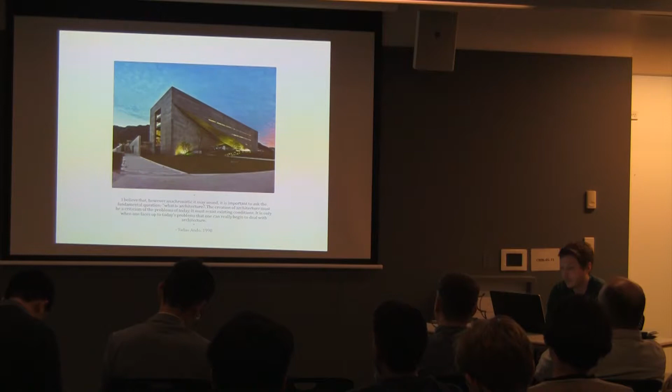So I'd like to propose the idea that producing architecture is an inherently political act. By building form and space in the city, we support established ideologies or the status quo. We stake out space for autonomous action, or we probably do both to certain degrees.

I would propose thinking of architecture in the city as a kind of material framework for society, which emerges from within society but also alters the course of society. These may seem like extremely basic notions, but I'm arriving at them again to question where things are going.

Through the organization of material, physical material, as a device that mediates the interrelationships between itself, people, the city, the climate, and the social and cultural context of a place, I think architecture acts politically in the means by which it mediates those interrelationships.

Partly because the AAVS is based around Maison Domino, a criticism of Maison Domino perhaps, I'll present a few examples of instances where architecture has been used as a political tool. Throughout history, many of the greatest shifts in architectural style or formal organization have been consciously employed as political devices.

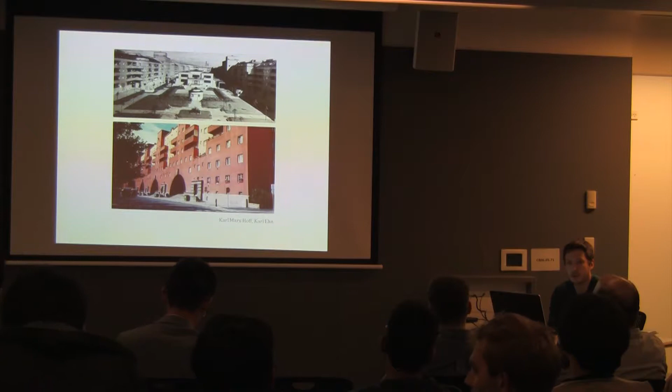The Viennese superblock did not propose a new style. However, its radical formal arrangements, reorganization, and abundance of collective facilities served to reorganize communal living under a new ideology. The intention of Karl Ehn in doing this was also to empower what he saw as an underpowered class within society.

We were just discussing this the other day, and it's a speculation, but I think if you look at the recent pop-up of different architecture in Georgia, it's not coincidental. Georgia was just in a war with Russia recently, and it's recently separated from the USSR. It's been 25 years, let's say, but I'd argue that in many cases these buildings carry traces of a Soviet identity, but they smooth and contort them to create a new language as well.

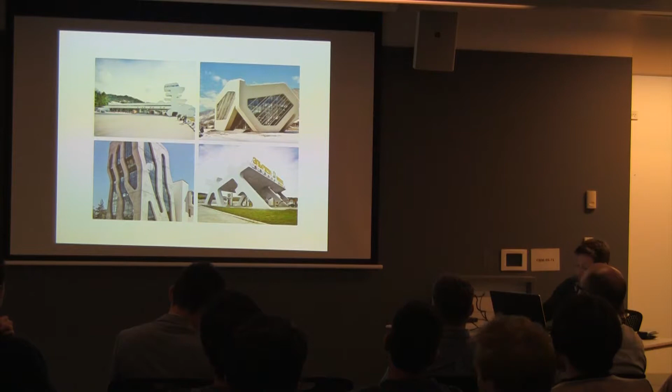I don't want to recite all these quotes, but this one's nice: architecture is political in the way that, as a space-time sensorium, it organizes being together or apart, the way it defines outside or inside. Architecture is political also in the manner by which it makes the controversies of reality visible by means of its own spatial and aesthetic syntax, and can enact new spatial and aesthetic formations of sociability from within. I think that captures quite well what a lot of these examples are doing.

Nevertheless, some people, former mentors of mine I've had agreements and disagreements with, and I've appreciated actually Patrik as a critic - I screen captured this off of Facebook before I left London, and it's a pretty bold statement, so we can give him credit for that. He says architecture is not politics, not art, not science, not engineering. It is the design of communicative spatial form.

You can agree or disagree.

I think the last 15 years has seen the level of sophistication at which we, a young generation of architects, have been able to put to use an arsenal of generative tools, and we've become very technically advanced. However, in many cases we lack the foundation for a reflective, critical discourse attached to the work, and for me this is especially apparent at the urban scale. So this leaves us wondering, at least for myself, why we're doing what we're doing.

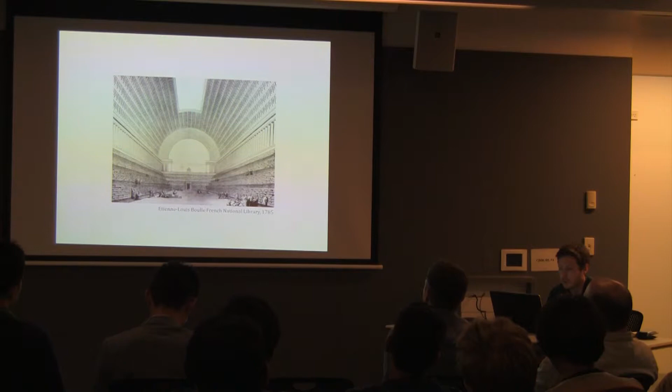What is the question we're asking ourselves now at this current point? I think we have an opportunity to revisit and reevaluate fundamental questions which have both recently emerged, but also persisted throughout the history of the profession. And I like to reference Etienne Louis Boullee, who began his seminal writing asking the same question: what is architecture?

He was the first architectural writer to reply to Vitruvius, and this was 1,600 years later, I think that was about right. But saying architecture is not firmitas, utilitas, and venustas, but that the first issue in architecture is neither technical nor aesthetic, but philosophical and ethical.

I think we have to understand the context in which he's saying this. He's living amongst the political upheaval in France at the time. So I believe that architects should always feel a sense of responsibility, especially the people working at this scale in China, let's say, and other places in the world, to consider carefully spatial organization, materiality, fabrication, construction in their work, much as potentially architects in a time of political crisis do.

Can we call the situation in China a political crisis? I think you can certainly call it a kind of environmental crisis and a crisis of architecture.

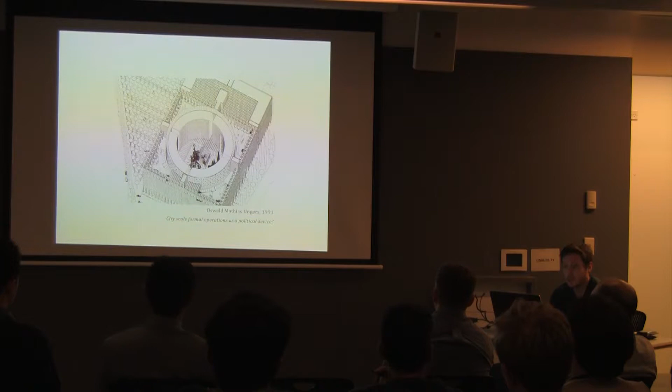The formal and spatial architectural autonomies are essential to what makes a city, and it makes a city a kind of essential arena for agonistic struggle.

I also like to cite the open frameworks of Yona Friedman, Cedric Price, and recently Alejandro Aravena to illustrate the idea that architecture can give autonomy, create conflict, negotiation, evolution of identity, and as he was saying, a mobility unfettered by the historical imposition of politically or economically imposing urban typologies.

And I also think it's just fundamental that architecture also has the means to operate politically against a wave of global homogeneity, and this happens probably spontaneously, especially in the case of Wang Shu, through a kind of climatic, geographical, and culturally specific responsiveness. I think this is something that's probably already integrated into a lot of the work coming out of the new generation.

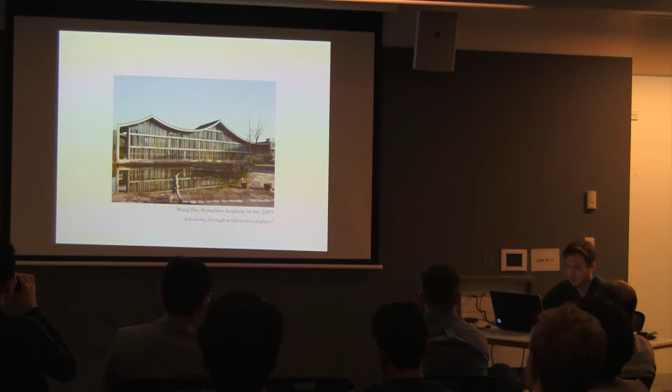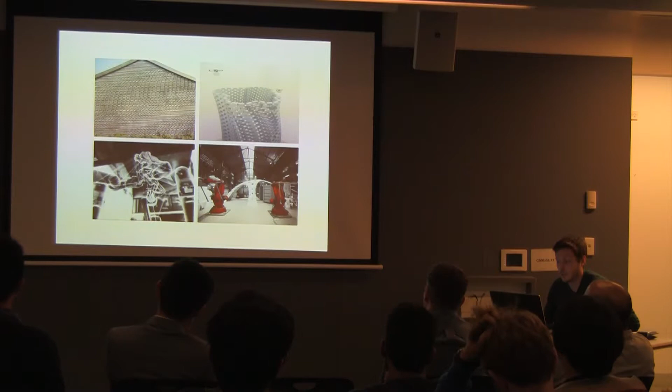So the question now, I think, is how do these new sets of tools and technology that we have at our disposal present a set of new opportunities to address some of the questions for understanding and response to a vision of the future for the material fabric of the society we live in.

I'm going to show a few projects. The first set of projects, some of these are quite old, and loosely related to that spiel, but the first set of projects I'd like to present are a few workshops that I've been doing at Hooke Park as part of the AA visiting school there, which is called Make Lab and is now directed by Jeroen.

And just to cite Mr. Kwinter, in 1993: our culture is moving decisively away from classical mechanism and reductionism—more specifically the physics model—as the system and method of explanation that has dominated our modernity for nearly five centuries is giving way to a biological model. This constitutes one of the most dramatic shifts in thought since the Renaissance.

So to try to frame this, the primary question we're asking with some of these projects is: can implementing new forms of computational fabrication technology set in motion emergent architectures that respond to event and context in a way that's unachievable through direct human intuitive design? And should the architect operate at the level of system enabler? This is, I would say, potentially a legacy of DRL as well, but framed in a slightly different way.

So we did Make Lab 1 in 2011. This is the forest of Hooke Park, part of the AA, but located about four hours' drive away in Dorset in the UK. The challenge we presented to the students was: take the Microsoft Kinect camera, take this custom CNC device—which is a briefcase that can be taken to the forest—and you have five days to do something with it.

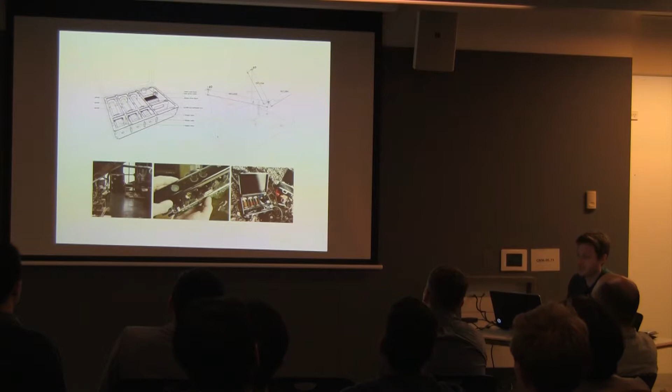They hung this—this is how it works—in three points, to be able to move this pointer anywhere in Cartesian space inside of that triangle. So through a bunch of testing models, they started using local timber as a structural material for building a kind of frame, and they designed a simple twist-in eye hook and cable tie system to connect the lengths of the hand-cut timbers.

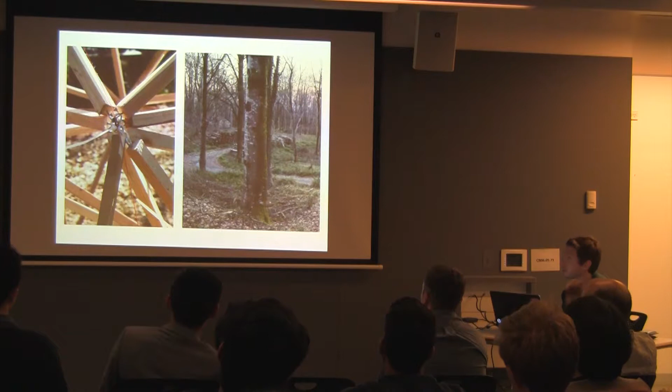What they did is scan this path for the first day while working on some models, and collected movement data from the site to generate a point cloud. Then, with help from technically skilled people, they translated the variable density point cloud into a 3D Voronoi with triangulated faces using an algorithm, so dense areas were kept clear so you could still move through, but with a higher density threshold on the edge of the path. There was a little bit of fiddling, but it was quickly done.

The triangulated structure in the design software is described as a series of coordinates in space, and then the CNC device points out these points, and the participants just follow it around and tie up these nodes. The amazing thing—the epiphany that happened after the workshop—is that no material is pre-cut or measured. You don't need plans to build it. You just follow the CNC around and construct something that otherwise, to build precisely, would have been a total nightmare.

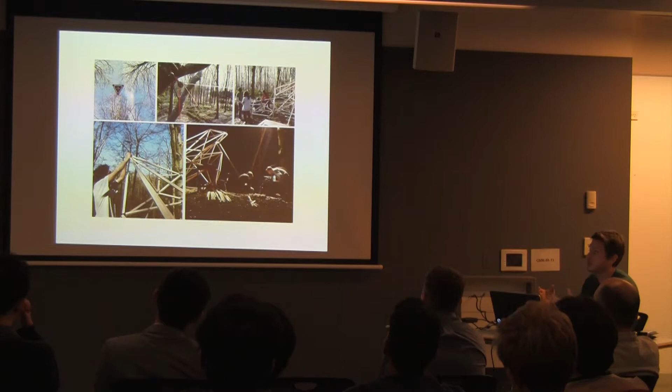So I'll just show a short video if it works.

This is just the initial setup—that's actually me in my kitchen calibrating the Kinect camera. I think that's still testing scans. This is testing to calibrate whether we know this thing is working or not, so we take a time-lapse photo and have it follow this path to see if they match. Here's the CNC pointer during some testing—there's the digital version you saw in real space. There's the model; we had to sort the points to sequence the construction. Sorry, it's a bit choppy. There's Jeroen and I, with a forest table wedged into the mud in the forest.

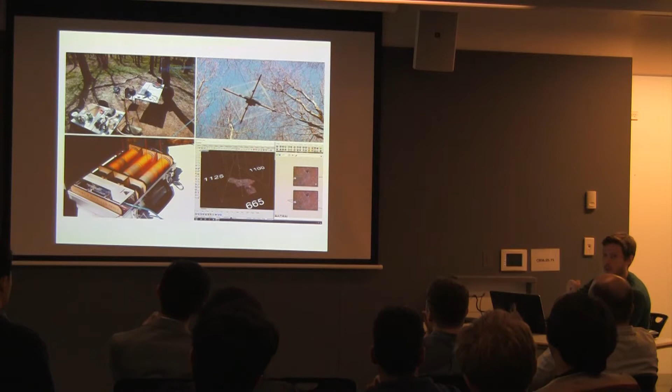Someone cleverly pointed out that if we just recognize where the lightest point is in that space after every weaving move, we can position the next weave to try to cover that point. So this just happens over and over again, continuously stitching, using a really simple clip-and-blue-rope system.

And you can see the CNC pointer there. We had to add a really long member to it to be able to get to some of the points, because there's a ground-to-tree-to-other-member pulling sequence. Ideally we would have gotten a lot further with this, to the point where it became so dense that you could actually read very clearly the space. But this is as far as we got.

It was quite a tedious process. But it was really amazing to look at this thing after it was built in the forest, because the trees are blowing and you see this thing kind of contorting and stretching in the forest. Maybe it's just symbolic, but I felt like something really had emerged out of that process.

So I'll also talk really briefly about a few projects from the unit. As I described earlier, one of the areas of investigation and curiosity is architecture as a framework, with the architect becoming the designer of an infrastructure instead of a final form to be appropriated by users. This allows us to expose some fundamental issues architects deal with, and the architect in this case becomes a sort of material policymaker and conflict mediator.

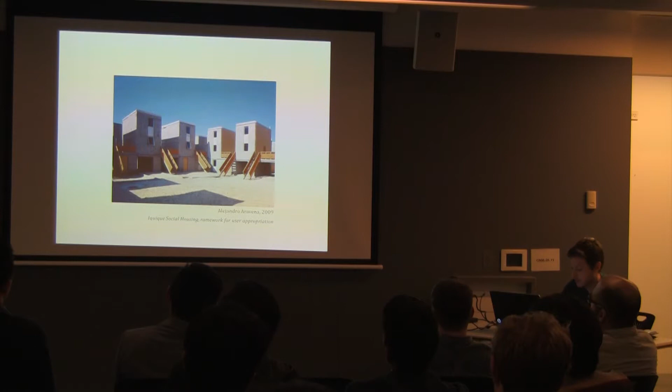The example I cited earlier was Alejandro Aravena. If you know this project, he did a social housing block in Chile with community meetings. The idea was that the site was so small, but people still wanted the ability to build out from their house to expand. So they came up with this solution, which I think is extremely elegant. You can see a few years down the road that people did expand, and they expanded it in the way that they chose to. So I almost see this as a kind of identity generation machine, though in a slightly watered-down version.

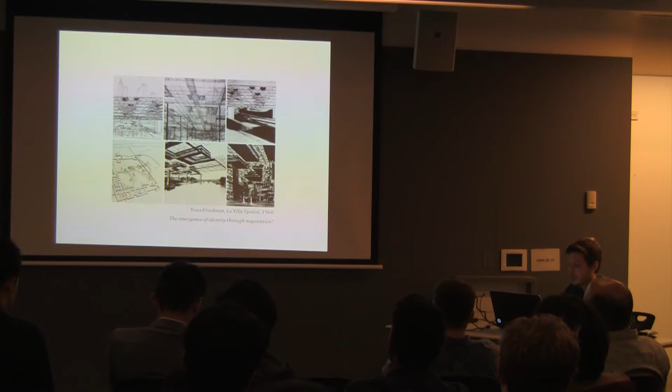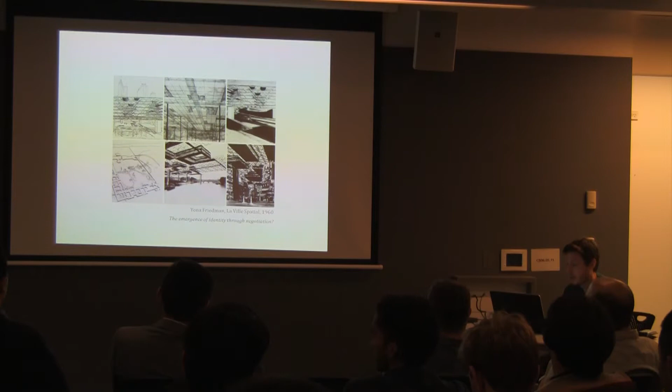At the Team 10 conference in 1960, Yona Friedman presented Ville Spatiale, which is a kind of lattice work floating above the city of Paris as an infrastructure that could be filled in the same way with housing. So planning rules could be created and recreated within this frame according to the needs of the inhabitants and residents.

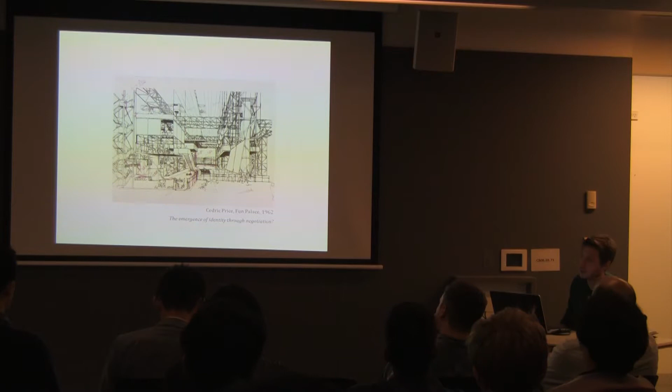And this is said to be the model for Centre Pompidou, that it was actually Rogers and Piano who adopted that idea. I think it obviously got constrained quite a bit, but it's still quite clear. So, a few examples of the work.

We do at AA in the unit system, we have two terms. First term is October, basically through the beginning of December. Then we have the second term, which is quite a bit longer - second and third term, about four and a half months.

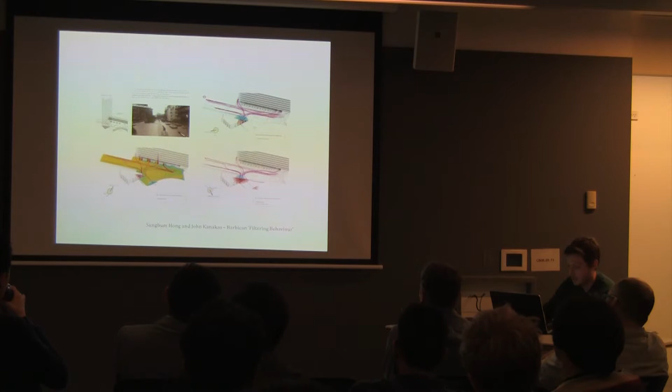Last year, John and Sung Bum spent several weeks at the Barbican doing a similar exercise, this time with more environmental consideration—sunlight, wind—but also spatial characteristics and program circulation, to understand how people use the space. They designed a flexible, parametric system for variable apertures to create different degrees of light penetration, sizes for social gatherings, or privacy levels.

They used these mappings and flow patterns on the site to graft the project into it, with the aim of provoking unexpected encounters with the space and between different people, trying to make people stay longer in the place. It's a terrible rendering, but that's all they had.

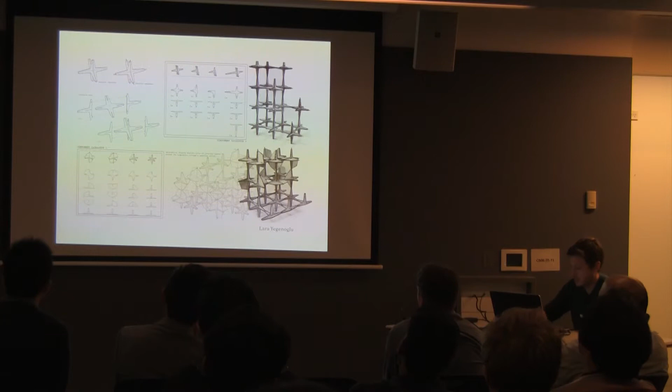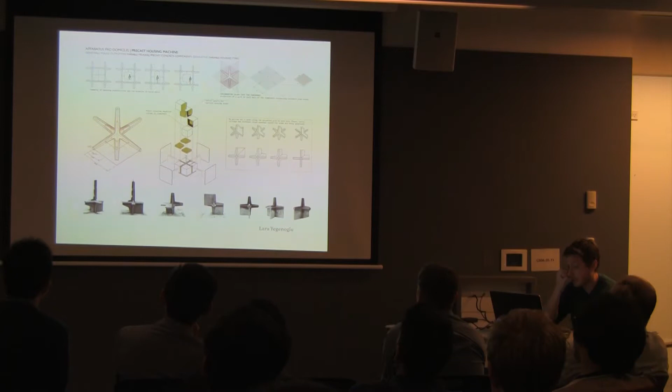In 2012, Lara created a system of tri-axial structural components, cast inside a customizable variable mold, so they could create a whole range of components—different lengths of members, different faces—and they built a one-to-one prototype.

This thing actually bottomed out the rental van getting the cement. They lifted the pallet into the back of the van—pretty heavy, but quite cool. We had to use a loader to put these on top of each other.

She also studied the typical kind of house in this. We went to Chongqing, China, and she studied the typical house and living condition, starting to make variations and modifications on that.

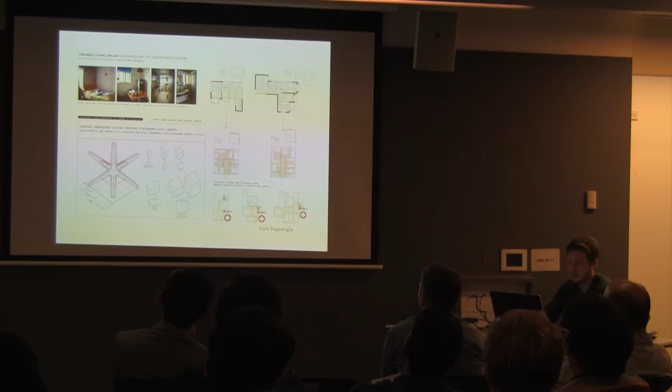Then thinking about how she modified the mold and the component to suit creating these types of housing, she started to go to bigger clusters, looking at social space and different layers of in-between and shared space, also drawing on Chinese models in the region but trying to twist things a bit to provoke slightly different scenarios.

She was doing hundreds of these studies of how you shift blocks around a bit, looking at the way that people can view through and occupy this space.

She starts working—this is actually just for the AAVS guys—this was in Grasshopper. She starts building a model to be able to stack, because she wanted to fit 500 units into a 150 by 150 meter site and make sure that the living spaces all received two hours of morning and evening sun. So she has a tight set of constraints to this.

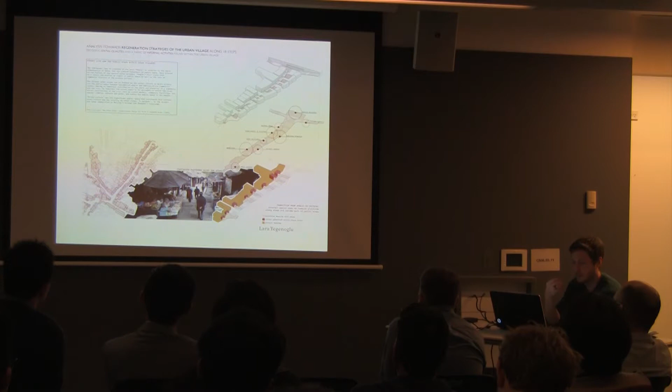The stacking studies also added new opportunities for different types of social space, and she realized that the market street in Chongqing is a kind of central place of public, cultural, and economic activity in the city. So she wanted to capture that quality of space and circulation, and also amplify it.

She initially ended up looking at the connections in the city, organizing this kind of market space as a series of terraced and interconnected places.

Then she started implementing her system, looking at providing a range of different user type accommodation within and around this street. Partly she left some of the frames open so that there could be a layer of user-driven appropriation, and not everything was completely built out.

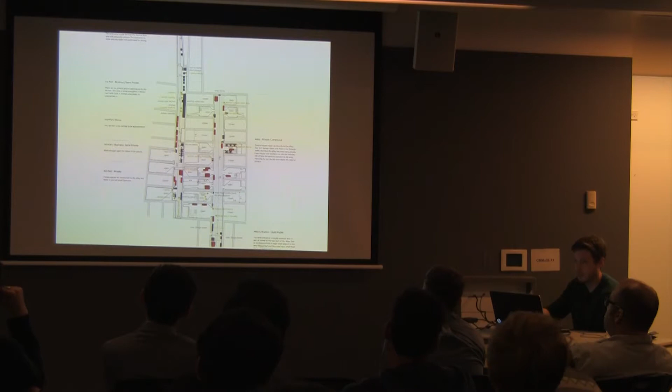Last year we went to Ho Chi Minh in Vietnam, and Jamie Keyser spent a week mapping the ways that people claim the in-between space there. It's a really fascinating place—people are always in the street. People always have openings to the street; the house opens to the street, the shop opens to the street. Everywhere seems like a kind of linear or grid-like public space, and people are using the space like that.

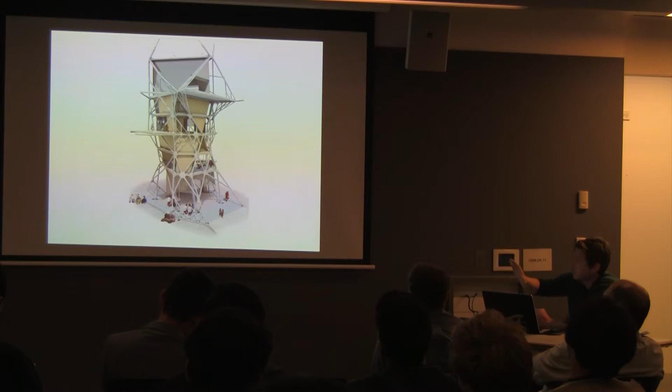He made these tests from that mold. This served as a system to create these kinds of structures with variable density, porosity, and edges. In this case, he's talking about a completely open framework with nothing filled in—no walls—but trying to understand through diagrams how to guide the growth of this thing to guarantee a range of social spaces, open places, sunlight, air, certain qualities. So this becomes a framework for that.

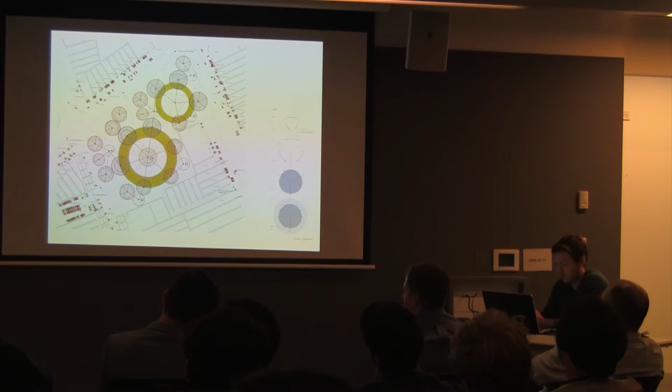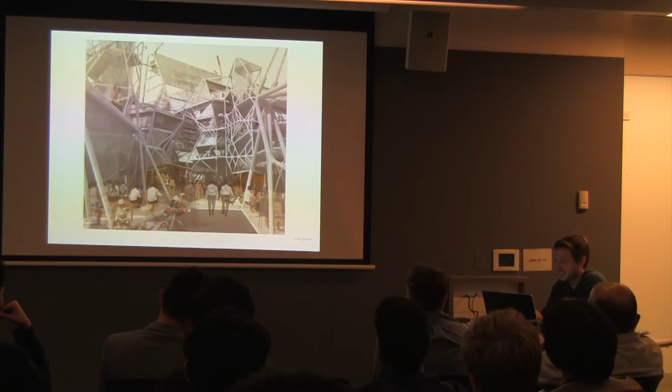I would argue this looks a bit scary actually, but I like the idea so much that I'm willing to show it. Just a quick comment—I took a photo before I left London, and this year I think we're asking some really interesting questions.

This is the South Bank site in London again. We're working on the second term project on this site now. One student—just for background—London is growing really rapidly now, everything is densifying, there's a lot of housing being added. This site is the most important cultural site in the UK, and they're building a lot of new office and housing towers around it. So with a very pragmatic question, I think we're asking some very serious questions about the city.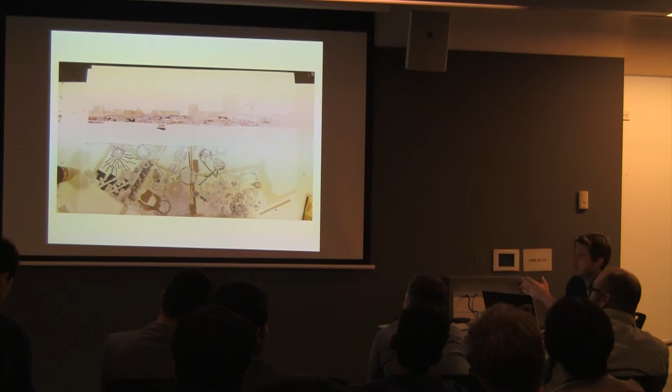This student has taken a bunch of cultural projects from different architects, and also a bunch of commercial projects like shopping malls and casinos that will likely go around the city. He's trying to see what it means for the city if you put them all in the same site. He's a bit evil in the sentiment—he thinks that consumption is culture, that it doesn't matter if we have open public spaces or cultural programs, all we need is the shopping mall. So we're throwing all of this into the place, and what we're really interested in is the interface between these things—how do you deal with the interface between cultural program and big commercial programs in a really dense scenario. This is the office location.

We're right in front of the Shard. That's obviously Tower Bridge, London Bridge there.

We won a competition about three and a half years ago to design a 4 square kilometer master plan in central China. This is the one I was talking about—it's with the local architects now, and it looks like they're going to start putting the infrastructure in pretty soon.

Obviously, I consider this an enormously important task with heavy ethical implications. Amongst the range of pragmatic issues we deal with, there's also the issue of urban homogeneity in China. I think the infrastructure, as well as the architecture, seems to be culturally and socially unsustainable, and it's quite destructive to the potential of what the Chinese city can be.

There's also a clear challenge in the social segregations that are part of the Chinese urban fabric—there's always walls around everything, always gates around everything, the city is quite fragmented. I understand this is a culturally ingrained thing and probably won't change, but we're trying to work with diagrams, weaving networks, and thickening ground to understand how we can challenge this a bit.

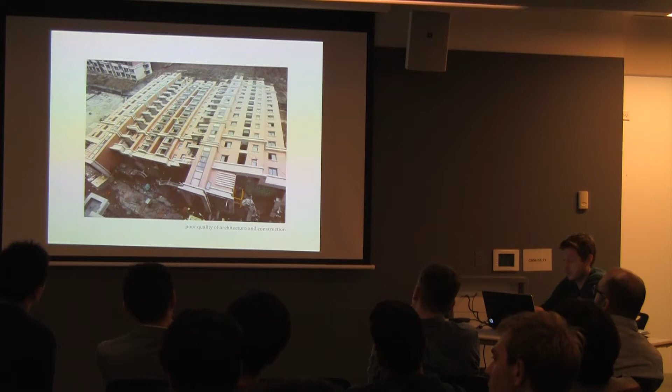There's also the consideration of the quality of the human habitat—I'm using this literally and figuratively to say that the way they design buildings there, with consideration to the quality people experience, is pretty much like this, it can be described like this. 500 million people will move to the Chinese city in the next 15 years—you can imagine the scale of this project is quite insane.

I'll just present quickly two projects that we've done inside the master plan. I don't want to present the master plan itself because I want to change it right now—I think it has some great aspects, but it needs a bit of reflection.

Just to describe the workflow in the office, so you have an understanding of where this stuff is coming from when I show it. We work in generative models, so we work with Grasshopper to create all of the components of a building that are over a scale of 1 to 50, basically. And we work that through to BIM, to Revit, and we output the drawing sets from that within this loop.

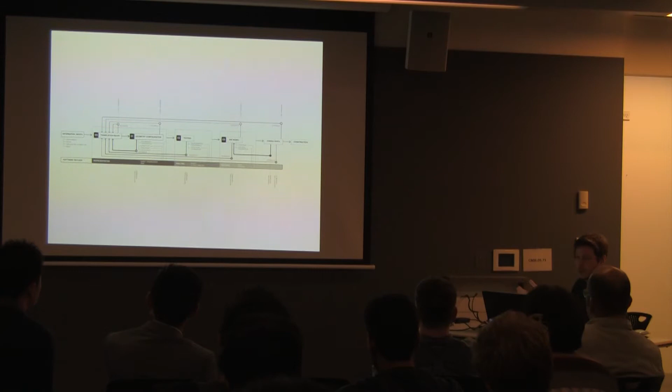The great thing about this loop is that the consultant or the client can say, change it. We can change it in the source model, and about 15 hours later, we have a new drawing set, right? Whereas when a client or an engineer used to come to you and say change it, it would be a nightmare. It takes forever to do that.

I think the benefit of this to the architecture is that we can test many more things. We can work much faster. We can achieve higher quality of work somehow.

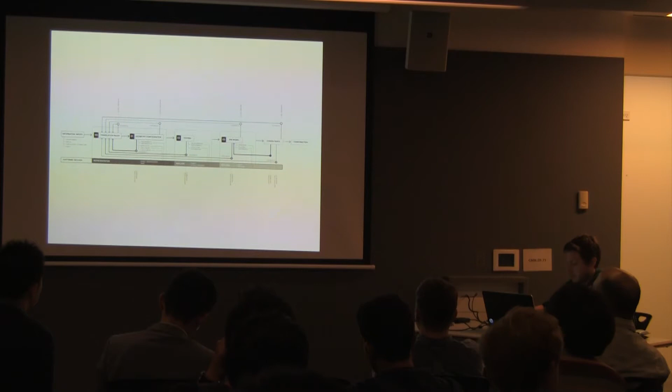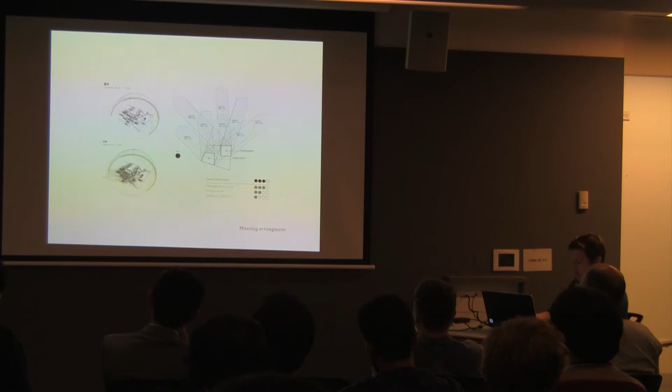So to describe this project, the first step we took was to arrange the massing of these two towers. We have quite a constrained brief, if you can imagine, but to avoid self-shading and to avoid shading around the surrounding site, we look at program organization, and we dynamically code that based on the relationships that we think the program should have to each other and to the site.

This project is an office tower on the right, the tall tower, hotel on the left, and the bridge with fitness center, restaurants, and the plinth has shopping, restaurants, ballroom, conference center.

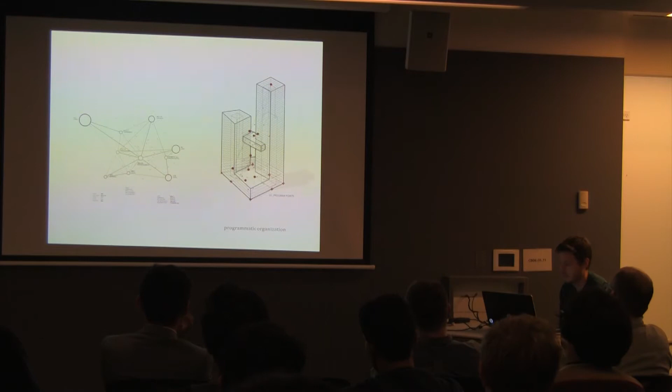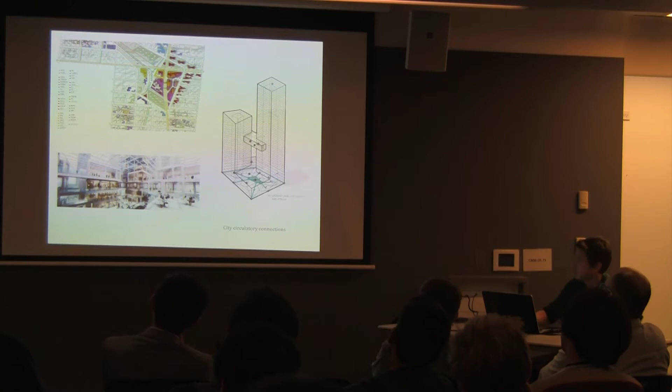These are used to drive a mapping and placement of voids and winter gardens in the building. And if you notice the cutting through the plinth, we're organizing the void and the circulation in the plinth so that the geometry of the building is shading during the summer when the sun is overhead, and letting light through the building in the winter.

And the result of the space is actually quite nice, and we can kind of modify that result through the code, through the way that we interpret the code.

So there's a bit more freedom to add more winter gardens in that space. There are a lot of small private winter gardens. But as we go down and throughout the entire height of the tower, we have 4 floor and 2 floor atrium spaces, and these can be used by all offices on multiple levels.

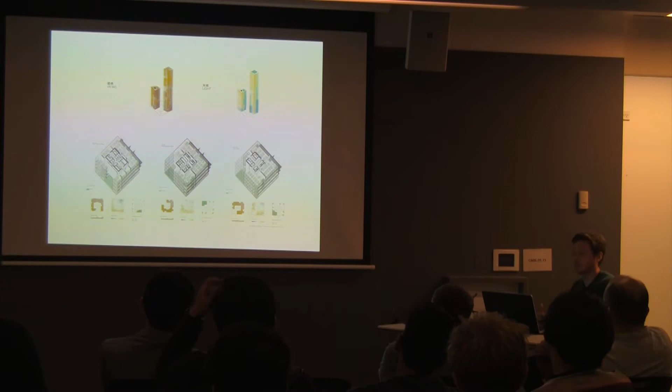The idea is to create a communal winter garden, intended to become a space for encounter and interaction within the building. So we studied a range of activity types to drive the dimensions and locations of these winter garden spaces. I recognize these may not be used in this way, but we're trying to create a sort of narrative that gives a finer definition to how the building can be used.

And we're mapping different types of those winter gardens, you can see being sort of placed within the building in this way.

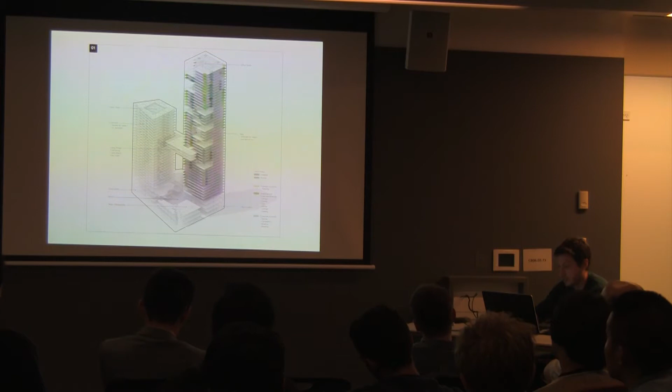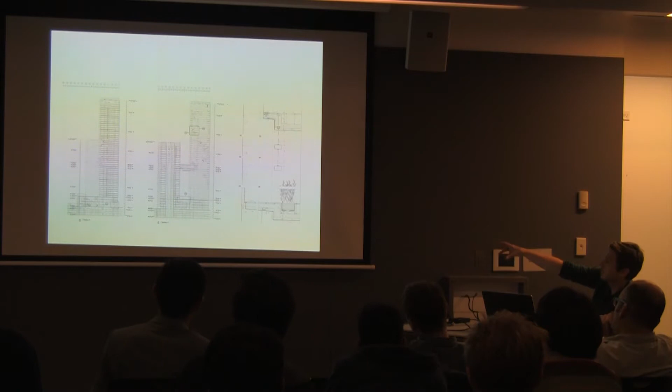So just a quick environmental comment. We're working with a facade engineer in Beijing now to try to work out this double skin system. We may or may not get there, and we may have to add some kind of louver element to shade, because this needs to be considered carefully. I'd like to show this because you can see one of the planters in the floor package there. This is the DD set for the project.

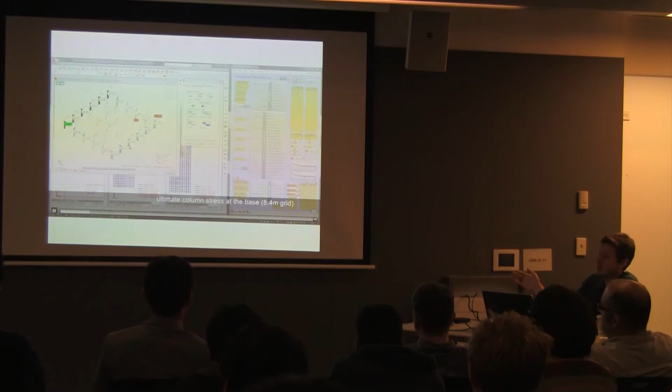I was going to show this video. One of the amazing things we've done with this project is working with Buro Happold in Beijing. We've been working back and forth with them, and what they're doing is trying to optimize the structure for the tower using Grasshopper and an evolutionary solver, which creates random variations, tests them for fitness, and the most successful ones are repopulated, tested, mutated a bit, and tested again. Hopefully we come up with a highly intelligent and efficient solution.

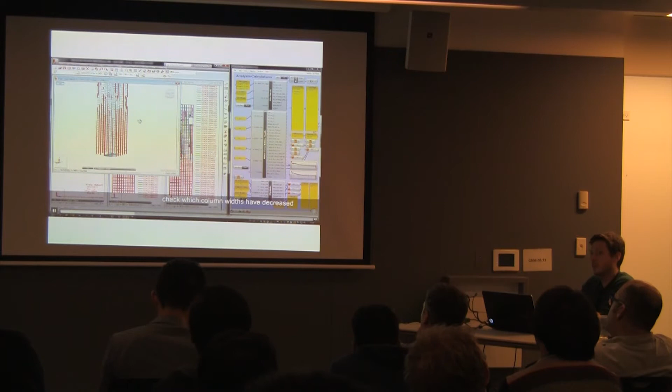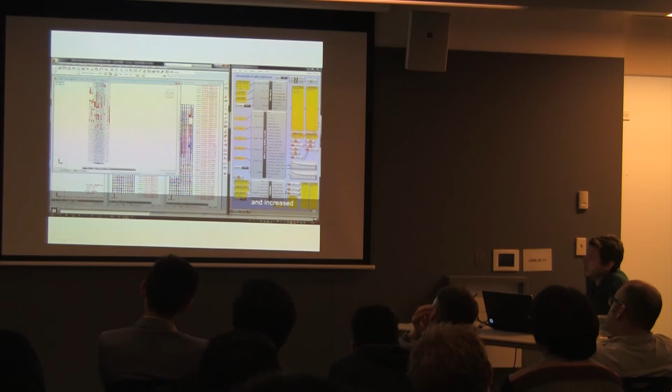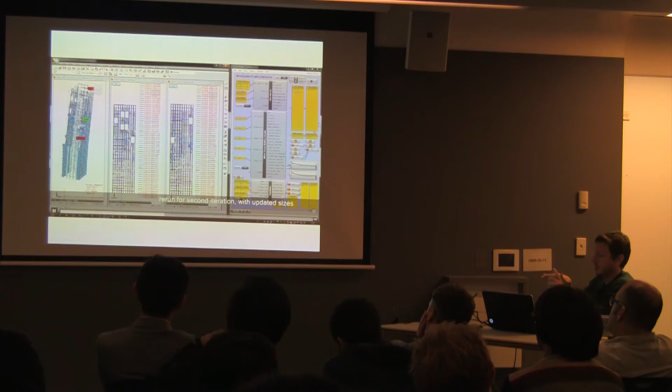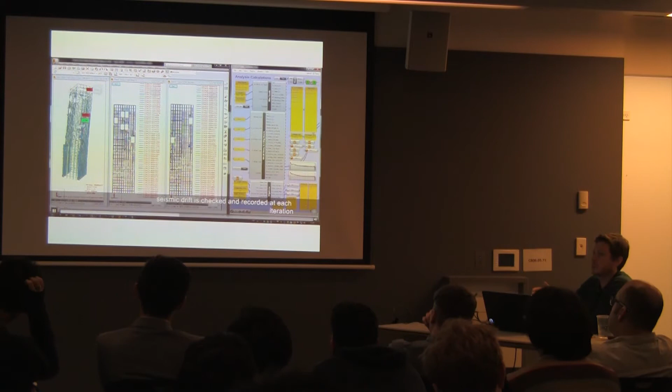The issue that necessitates this is that if the tower didn't have these structural porosities, you'd just run a very symmetrical system over the building. But we have a bridge, a linked tower, and big openings without structure, so it needs to be carefully calibrated. We gave them a few rule sets: you can change the size of columns, or subdivide an 8.4 by 8.4 meter grid cell so they can split it up. They integrated those rules and allowed those things to happen, which is why you're seeing different densities of structure, different colors, different thicknesses of members, and different density of subdivision.

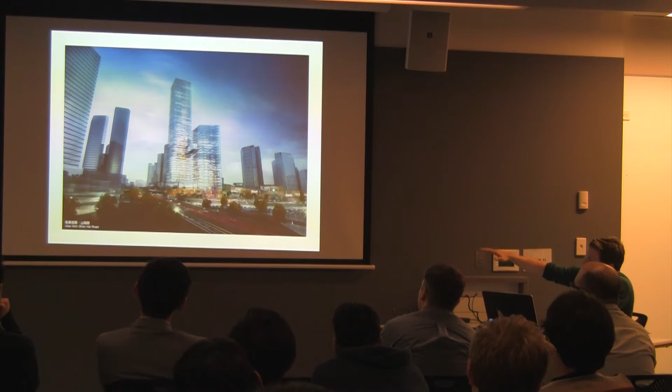This is looking from one of the main roads. This is the master plan — we have a ground that's dipping. It's very hard to see here, but we have a central plaza, and the ground is actually going below the road and stretching off in a few different directions.

Above, you can see this plaza a little bit more down here. We also designed a mall across the street, which you can see the long shape of in the background. There's a large pedestrian network that grafts into the entire city to connect every block with a moped network and a pedestrian network. The giant staircase is actually that pedestrian network, and this is the only moment where it has to go above the road, but it goes into the mall and directly through the mall right there.

That will also go into the other neighborhoods, and we're hoping if they keep building, they keep continuing this network of connections. It's a sort of linear park — instead of a series of disconnected park moments, we do a linear park to give a different alternative means of occupying and moving around the city.

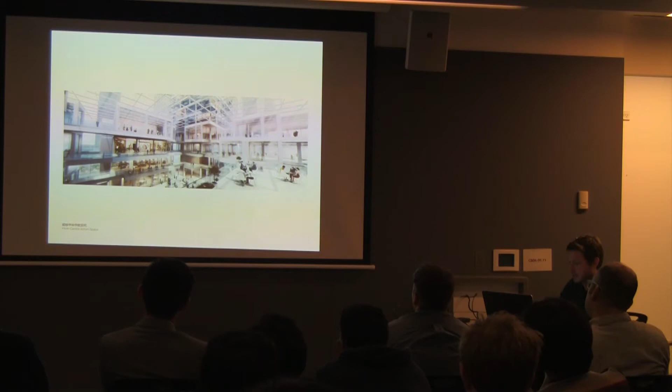That's the central space. These are from, I think, the draft conceptual stage, so don't mind the structure on the roof — and this is the facade. This is the bridge with the pool and fitness center, restaurants across on the other side of the bridge, looking from some office spaces above.

Just one more project I'll show. We just completed the conceptual phase for this project about a month ago, and we're starting the SD phase now. This is a 200-meter office tower with a mixed-use plinth, which includes a hypermarket and a cinema.

What I was describing earlier with the evolutionary solver process — we actually used that to test different variations on this building, and that's what you see. This is actually the cover of the booklet that we submitted to the client, but there's a whole series of different iterations that were tested.

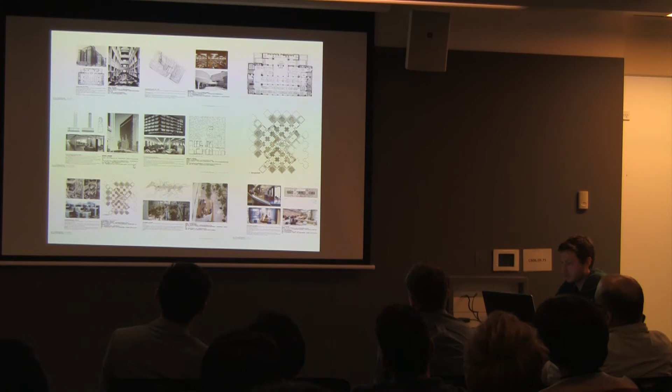The way we started this project was actually to write a sort of essay about the history of office space. In the last 150 years, office space has evolved into a range of different types suited to different industries and company structures. But even though they're very different and evolved to meet different demands, we found some correlations in the features and the evolution that are consistent across all the examples.

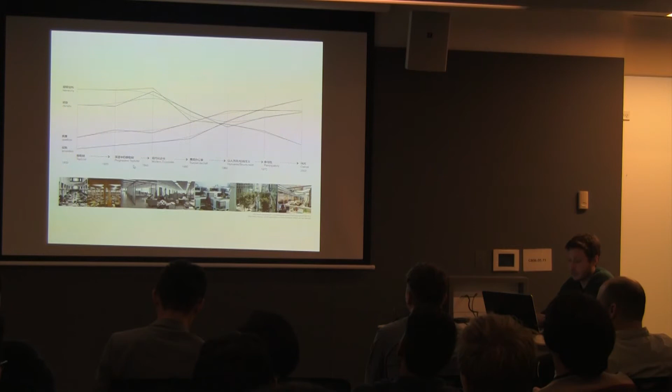To really simplify it, we'd characterize that with the idea of profit per square meter as a performance criteria, not necessarily people per square meter. This has to do with the happiness of the worker, the levels of innovation they're putting out depending on the company type, and the amount of time they stay, things like that. So if you increase productivity and innovation, you increase profit, and that's the trend we're looking at.

This is a really ugly presentation because I didn't have enough time — I took this directly from a thrown-together client presentation. Didn't have enough time to work it out. Sorry about that. But if you read Chinese, it's great, I guess.

Just illustrating some examples to them. The left is the Victory Center in Baltimore in the U.S., and obviously they're trying to pack as many people into this space. We were looking at these companies that use these different models, and in this particular company, the worker productivity was very low. This is a historic model that a study was done on—there's frequent turnover, frequent vacancy, and short-term tenancy eventually in the building.

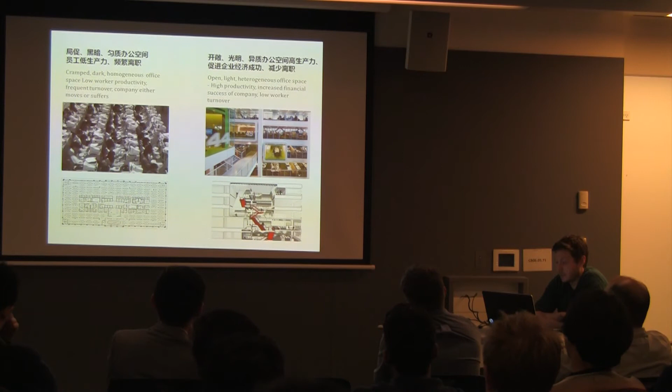The model on the right is the Macquarie Group investment banker's office, and this company, because of the architecture, basically has an extremely low turnover rate. They were occupying a building like the Victory Center earlier, and they achieved 30% greater productivity over their previous office space.

So we proposed a series of bundled tubes, and these tubes can shift in section and position, and they can also scale throughout the height of the tower to accommodate different qualities.

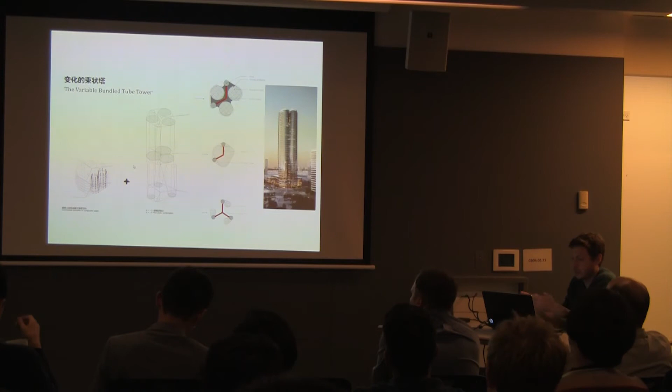We propose a split core configuration. The core is actually a tri-axial, sort of tripod split core—3 cores, and one of them drops off. You're seeing one of the upper floor plans to the right, where the low-rise core is not in there anymore. On those levels we achieve an 83% efficiency, which maybe isn't that interesting to you, but we're telling it to the client.

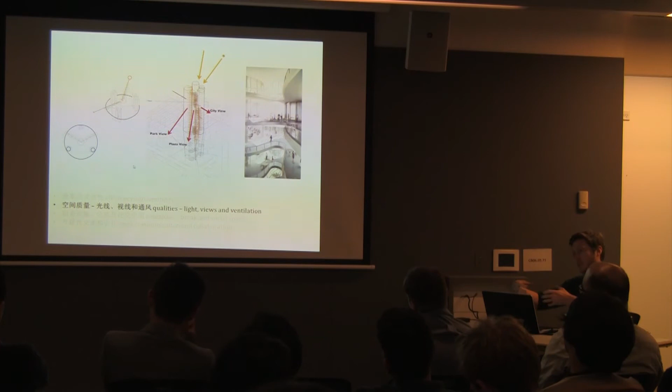Sales pitch. This split core arrangement allowed us to create internal voids which bring light into the heart of the building, obviously, and frame views out over the city. We're looking at oblique angles when creating these openings. These openings not only cut through the building, they shift the tubes and scale the tubes through the generative model.

We have a set of diagrams that drives the behavior of the building as we modify things. You can see at the top, as we have two tubes slightly coming apart, we create a sort of interstitial space opportunity between partitioning. As we go further, that's when you create these sort of void spaces—it's like this stretchy space that gets broken.

So we're just trying to integrate these features that have been proven to boost productivity and efficiency in the building. One of the characteristics that's really important is creating this kind of visual connection and communication across from office to office.

In a one-office-per-floor scenario, or an office that occupies multiple floors, they can use internal stairs through the void to connect the office space—you don't have to use the lift. They have an open view to the entire office from different points.

In a multi-office scenario, several companies can occupy the same floor, and hopefully we use these spaces to kind of cross-fertilize a bit.

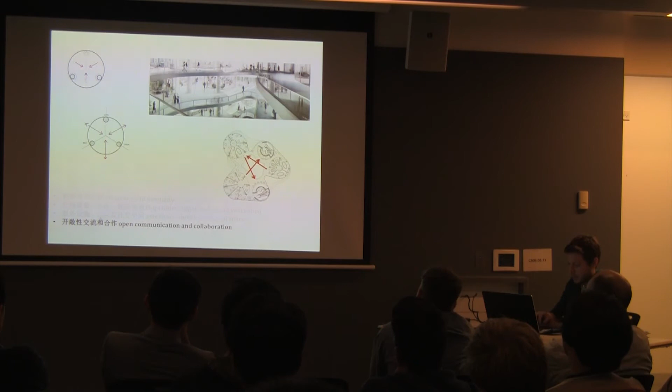One of the primary drivers was also to think about the visibility of this building, because it becomes an important landmark for the client in the city. We started making a generative model based on these desires and needs—advertising for the cinema, visibility for the tower, and the bank also needs good visibility.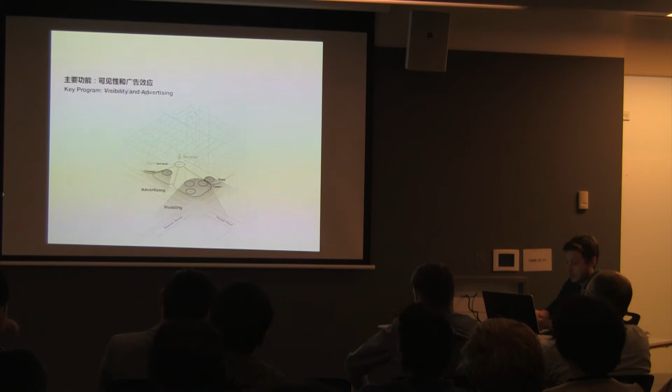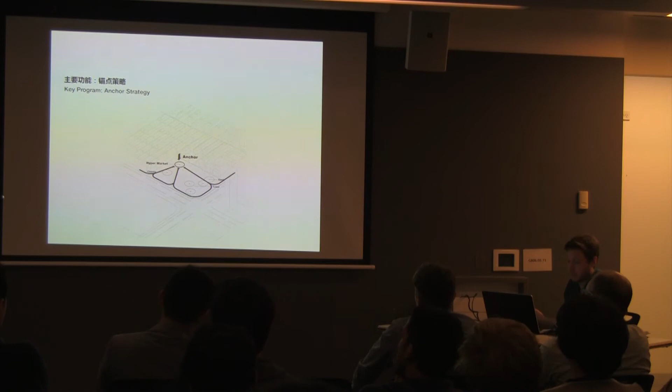That one's changed because obviously it's not working that well here. We wanted the hypermarket to be the key anchor program, as we call it, so we want to pull flows of people past other retail shops and programs that can feed off of that activity, that traffic.

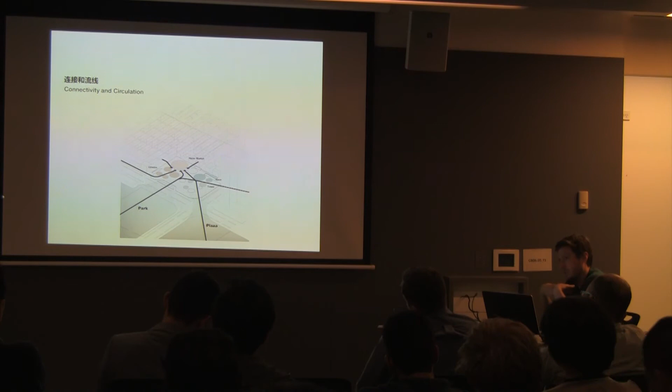Because the central plaza of the city is just to the southwest corner, we want to use the system of bundled tubes to open up the building on the ground floor and try to create a sort of continuity of that public space into the building.

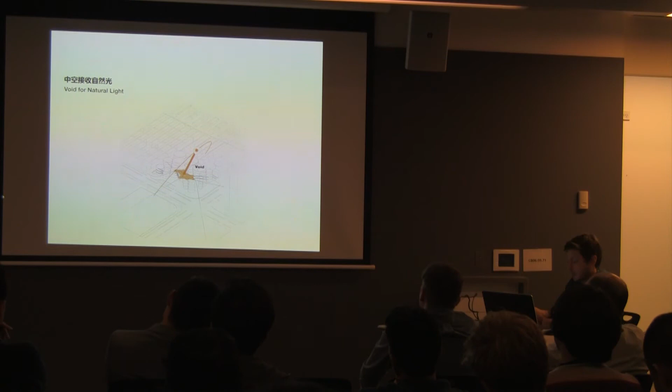We lifted the cinema to get more advertising potential. Again, we're looking at a central kind of civic space, hopefully inside the building, and calibrating that with the sun angles.

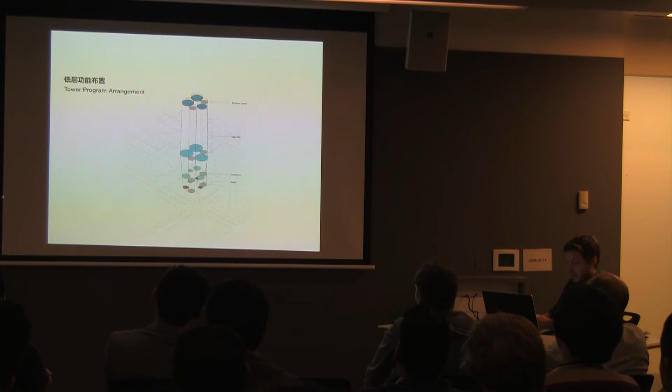Creating other opportunities for terraces and things by the way we manipulate the behavior of the geometry, and we're actually sucking in the geometry around the tubes to create the entryways with canopies and obvious communication of where the entry is.

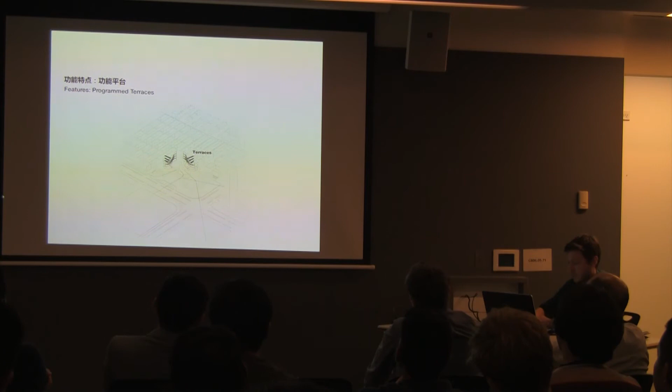That reverses in some places to get a sort of terracing situation which can be used by some of the program. The retail program occupies the legs of the tower and feeds off of that traffic that passes through the building into the anchor programs here.

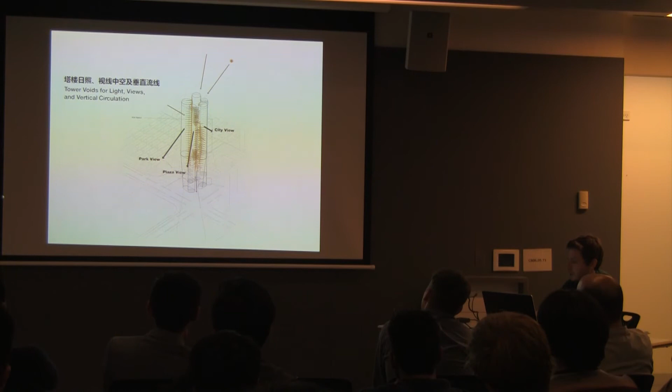The office has a quite efficient floor plate that's taking up probably 60% of the tower, but then the top is a bit more spacious—yeah, let's flip through this.

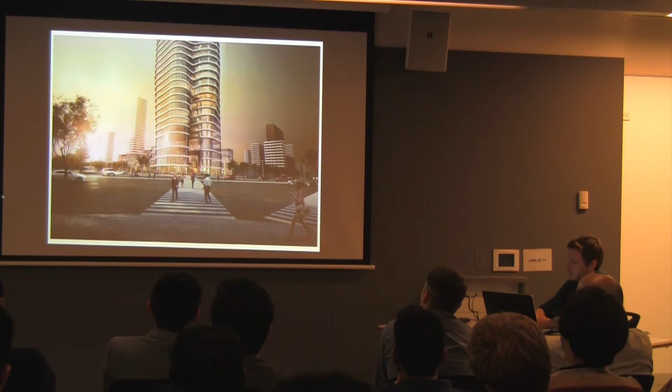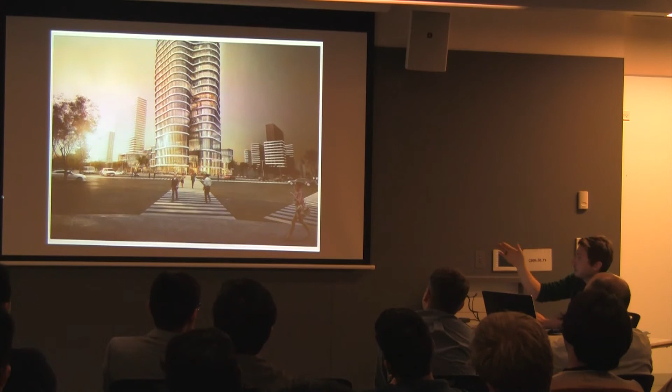So we proposed a diagonal crosswalk from that plaza, and we're also opening up these legs now a bit more, trying to figure out how we can get that to work with all of the constraints, so that we get a clear view and pathway in through the tower there.

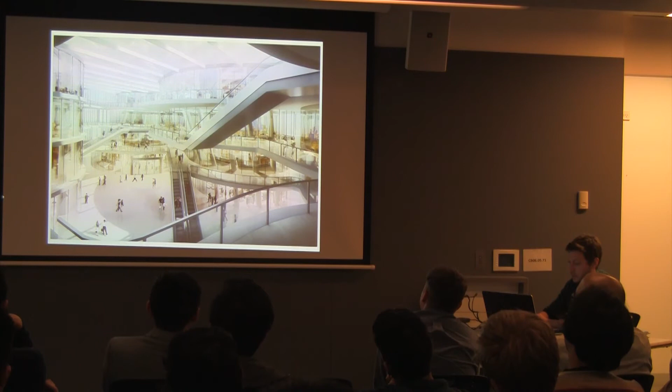And this is looking into the central plaza space inside of the building here. Back at the hypermarket, we're looking from the lobby, exit of the lobby of the tower into that space. Sky lounge on the roof.

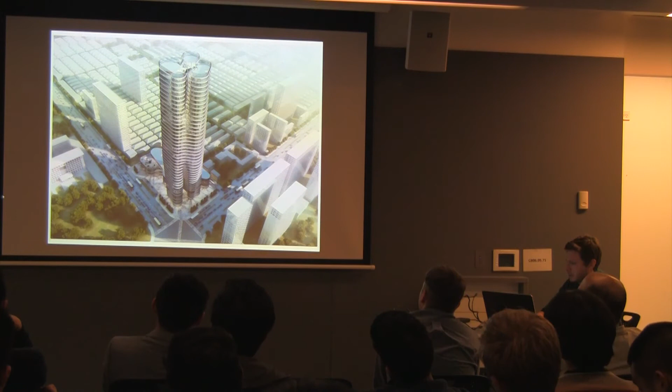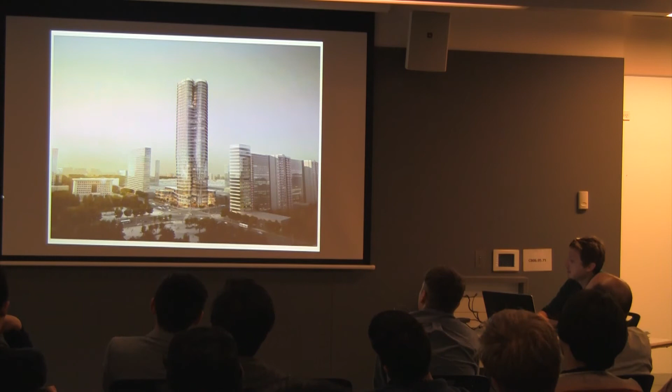That's the Communist Party building to the left. I don't know what that means, but... what's that? Yeah. Oh, ouch. I hope not. Yeah, maybe.

Sorry, I think I showed this already, but that's one of the interior spaces, and this is not quite the right angle, but a lot of these spaces cut through oblique angles, and they frame places in the city, like the central civic plaza.

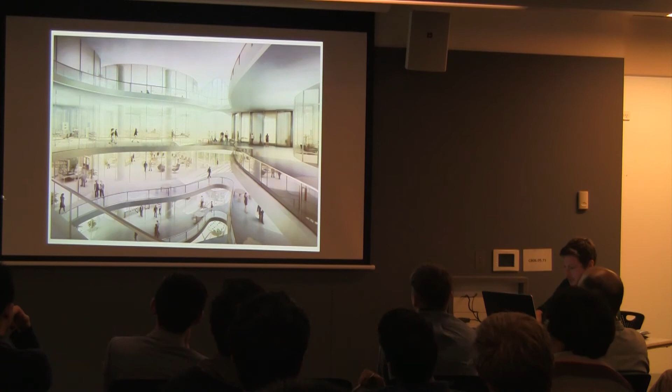We use this quote sometimes, partly because Churchill said it at the AA: there's no doubt whatever about the influence of architecture and structure upon human character and action. We make our buildings and afterwards they make us. They regulate the course of our lives. So I put those questions up there for you guys because I think it's pretty critical. Think about it for a few days and then see if you have the same opinion about what you do. Thanks, guys.

Do you guys want to ask questions if anyone has? Yeah, it's just, I think I got the microphone. Yeah, it's working. I guess it's an opportune time to take some questions from the floor if anyone has some, especially from our students. I think it's great that you've been on the other end of the AA panel. Does anyone want to challenge, ask a question? Did you say challenge? Anybody? Go ahead, Maxi. So this is impossibly awkward, of course, because as the host, I'm compelled now to ask a question, but obviously I left for the middle with my kid. So hopefully one of my colleagues.